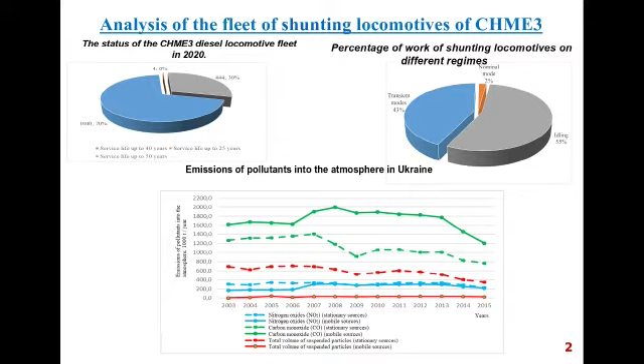Also, the analysis of diesel locomotives operation on different modes of operation was performed. It showed that in the nominal mode the diesel locomotive works 2% of the operation time, in the transient modes 43%, and in the idle mode 55%. Due to the fact that the issue of ecology is quite acute both in the world and in Ukraine, an analysis of emissions of pollutants into the atmospheric air by stationary and mobile sources of energy was made.

Fundamental research in this direction was and is being carried out in scientific organizations, especially such as Pryazovskyi State Technical University, Dnipropetrovsk National University of Railway Transport, etc. In connection with the lack of works in the field of selection of technical and economic characteristics of shunting locomotives with hybrid power transmission, with consideration of real operation conditions and ecological component, there is a scientific necessity in development of approaches, methods and models for selection of technical and economic characteristics of shunting locomotives with hybrid power transmission. At that, it is necessary to take into account real operating conditions and environmental indicators.

Further, measures were proposed to reduce the cost of penalties on emissions from diesel locomotives, which were divided into two groups. These are organizational-technological and constructive. In addition, each measure is characterized by criteria: environmental aspect, cost criterion of modernization, operating cost criterion of the effect of implementation, criterion of the duration of implementation. Taking into account the fact that the task is multi-criteria, the choice of measure is performed by additive optimization method by criterion. The calculation results show that it is advisable to modernize the locomotive with new power units and elements of energy-saving devices.

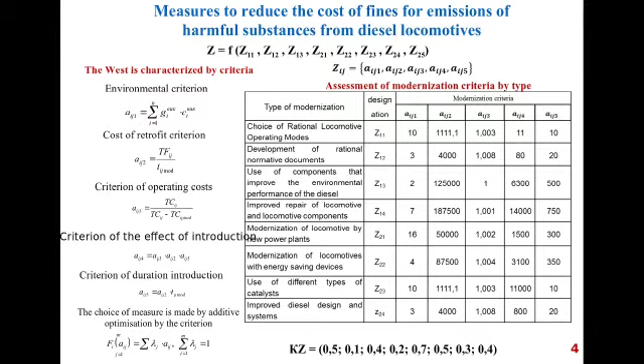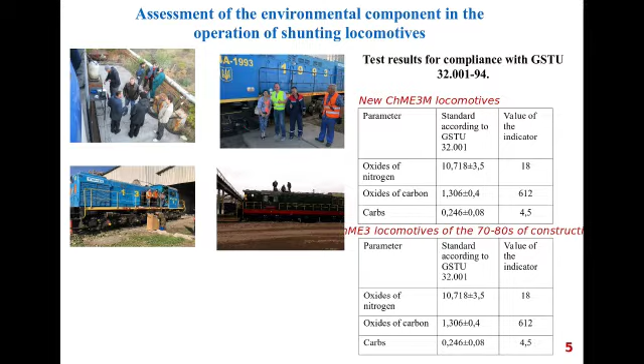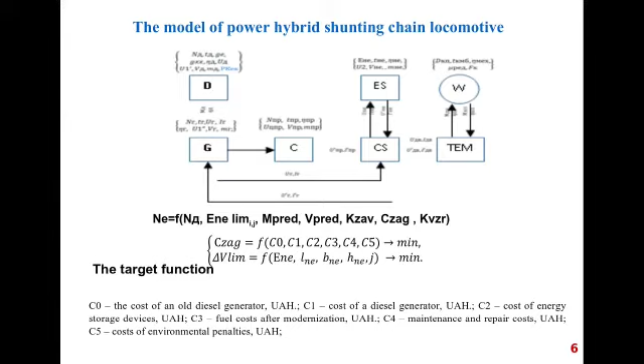Further, the varieties of power chain of hybrid locomotives were considered and a model of the power chain of a hybrid shunting locomotive was proposed using the expert method, which is presented on this slide. Guided by the European experience of environmental taxation, the target function for determining the technical and economic performance of the locomotive included the costs of the environmental damage, the cost of energy storage, and the cost of maintenance and repair. Following this, the model for determining the rational technical and economic indicators of a hybrid shunting locomotive was improved, which takes into account the environmental component. The basic equations are presented on slide 7.

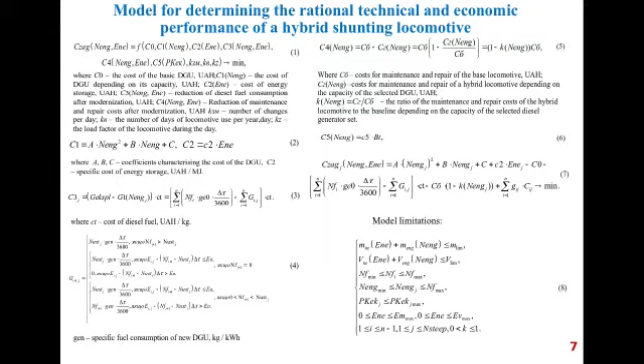The work also formalized the technology of shunting locomotive design improvement by determining the rational technical and economic indicators, a generalized scheme of which consists of a model for determining the rational parameters of the power plant and energy storage unit, which takes into account speed limitations, operating conditions, cost, indicators of the power plant, and its maintenance and repair. After determining the rational parameters of the power plant and energy storage unit, we determine the parameters of the power plant, and then, according to known methods, we make a calculation of the technical and economic characteristics of the locomotive. The procedure of determination is presented on this slide.

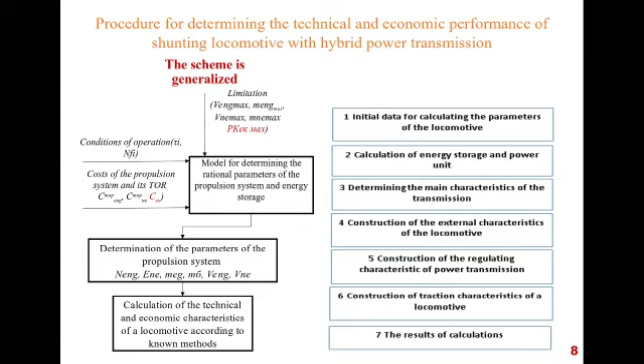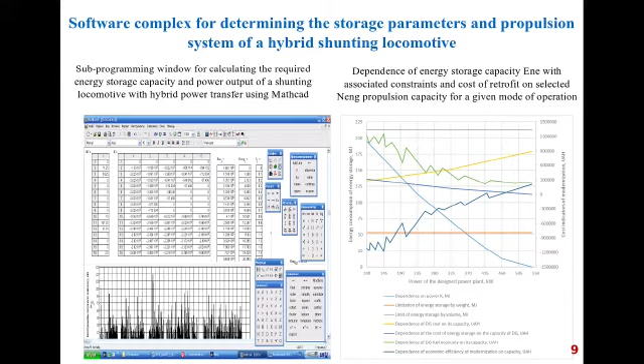Following this, the software complex for determining the parameters of the storage and power unit of a hybrid shunting locomotive was improved using Mathcad. As a result of calculation, the dependence of energy capacity of the energy storage unit, with appropriate limitations and cost indicators of modernization, on the power of the selected power plant for a given mode of operation is obtained. According to the software package for determining the parameters of power transfer of a hybrid shunting locomotive, the external characteristic of the generator was built, and the traction characteristic of the locomotive was constructed.

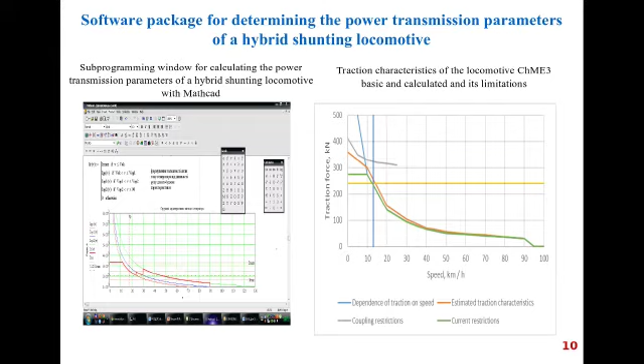The evaluation of the efficiency of shunting locomotives is proposed to be determined by an appropriate coefficient, which includes the technical level of the locomotive, the life cycle cost, and the environmental component. The assessment of the technical level of the hybrid shunting locomotive is proposed to be determined by the known methodology, the algorithm of which is shown on slide 11. Among the nomenclature of indicators characterizing the shunting locomotive when performing shunting work, we propose to take into account the power and energy capacity of the energy storage unit.

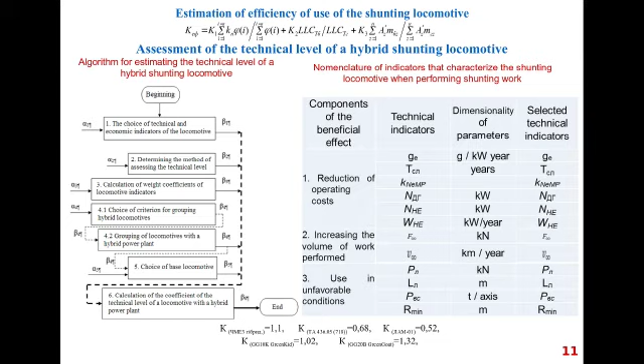Thus, the technical level of shunting locomotives with a hybrid unit was determined, the life cycle cost of ChME3 and hybrid-based diesel locomotives, and the calculation of the economic component. As a result of the calculations, the coefficient of efficiency when using diesel locomotives for shunting operation for the basic diesel locomotive is 1. For the modernized diesel locomotive with the basic engine and energy storage unit it is 1.13, and for the modernized one with the new diesel engine and energy storage unit it is 1.4.